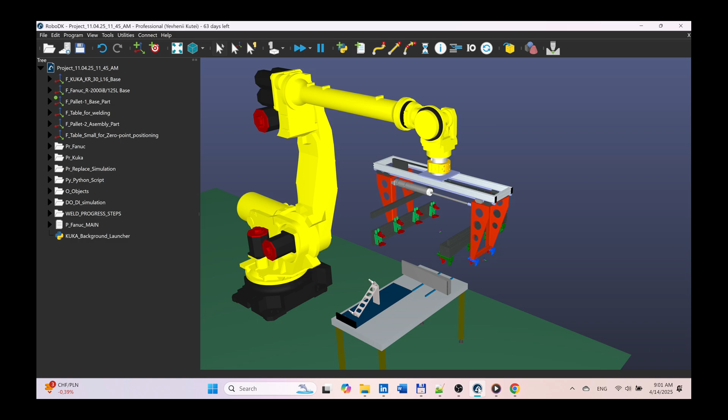This video describes one of the key elements of the published project, the gripper, designed to work with a FANUC robot. The gripper performs gripping, positioning, fixing, and transferring of the product components.

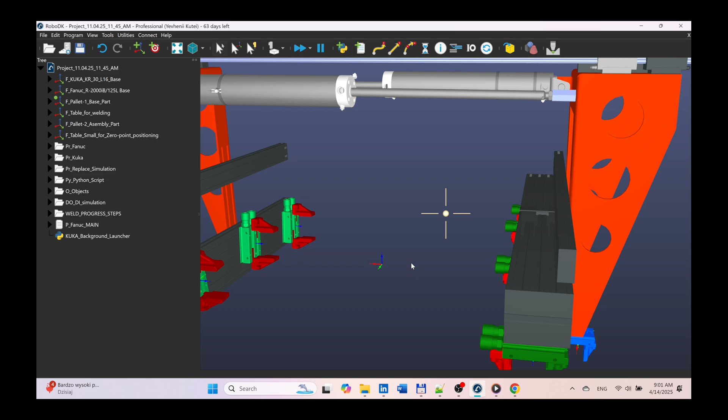Due to the absence of suitable models in the RoboDK library and online, it was decided to design a custom gripper. Its construction is adapted to the specific project tasks, taking into account the need for high positioning accuracy when handling the base part of the product, its gripping and precise placement, as well as the stiffness ribs.

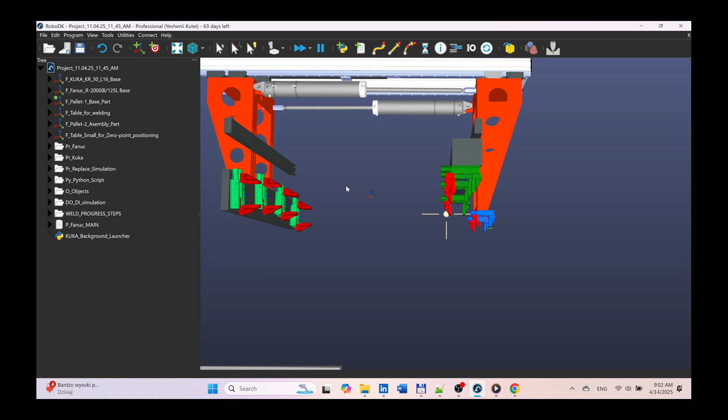On the GrabCAD platform, 2 gripper models were selected as a base, one for editorial adaptation into the main gripping mechanism, the other for adaptation into additional fixing mechanisms. I worked with STL models in FreeCAD and Fusion 360, performing component arrangement and basic preparation, and in RoboDK for final assembly and mechanism creation.

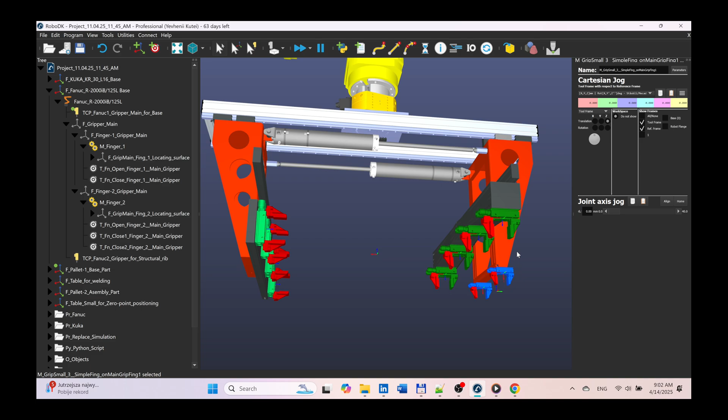The assembled gripper system consists of: 1. A main 2-finger gripper with linear opposing movement. 2. 10 auxiliary fixators mounted on the fingers of the main gripper, implemented in 2 configurations. 2 synchronized fingers with linear opposing motion: 3-component single-axis mechanism. 1 movable finger: 2-component single-axis mechanism. All components were integrated directly in the RoboDK environment.

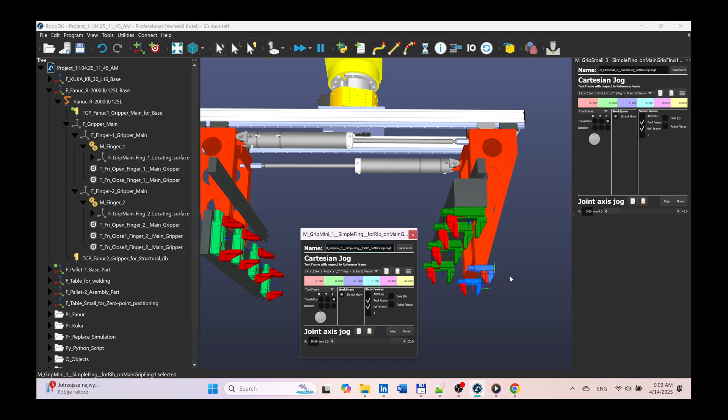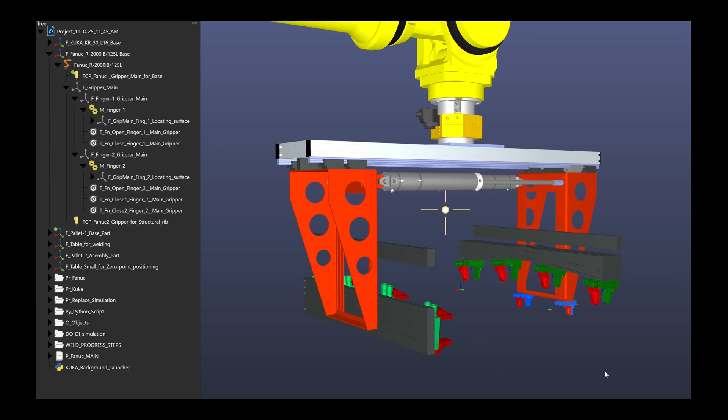The implemented gripper design allows gripping components of different types and sizes, independently controlling each mechanism, applying a step-by-step gripping approach, compromise solution for the main gripper. During implementation, it was revealed that in RoboDK, creating a 3-component single-axis mechanism with linear synchronized opposing motion of active fingers does not support assigning a separate reference frame for each of them.

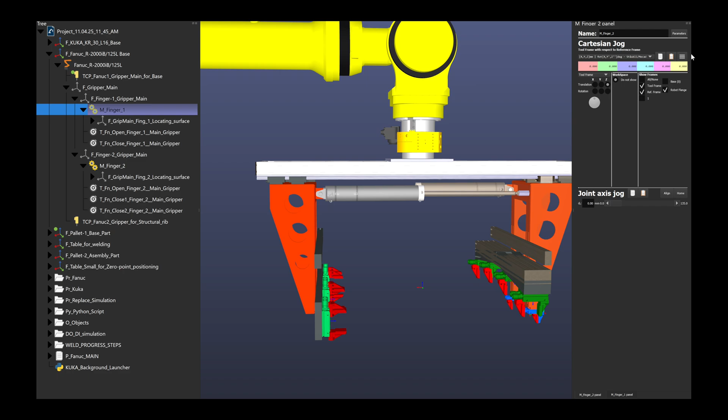Since my goal was to build a 2-finger mechanism with the possibility of placing additional gripping modules on each finger, the decision was made: based on 3 elements, 2 2-component single-axis mechanisms were created with opposite attachment of fingers to the base of the gripper. This approach allowed assigning a dedicated reference frame to each finger. Each mechanism controls a single finger, and both are installed on a shared reference frame in opposing directions.

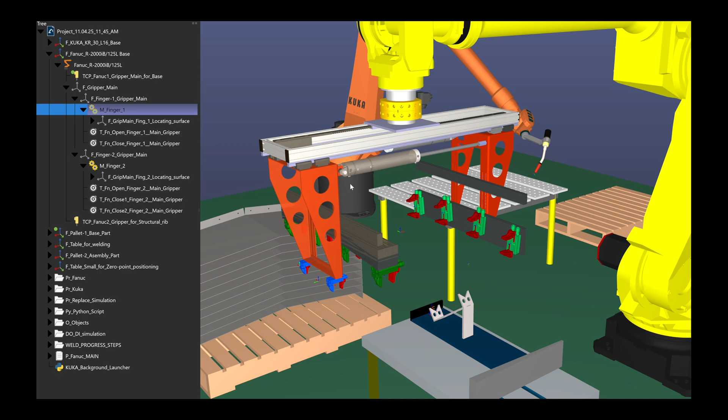Advantages of this solution: independent control of each finger, ability to attach separate groups of fixators on each finger, full integration into the RoboDK structure without functional limitations. Although a compromise, the solution is fully functional within the capabilities of the simulator and the project requirements.

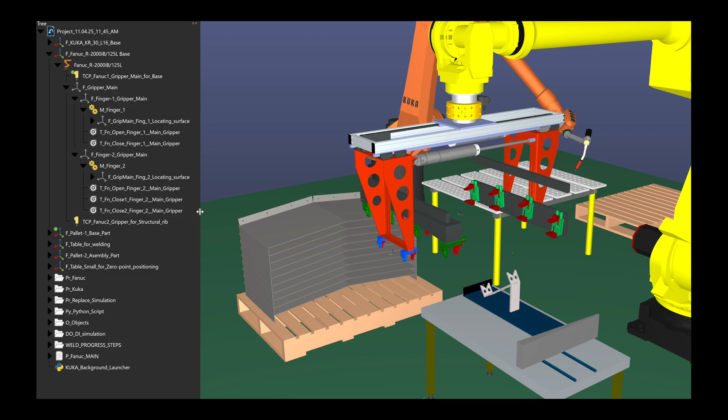The gripper design includes 8 internal fixators for securing the base product component, 2 side grippers for handling the stiffening ribs. For operation with the FANUC robot, 2 TCPs were assigned: TCP-1 central module, TCP-2 side grippers.

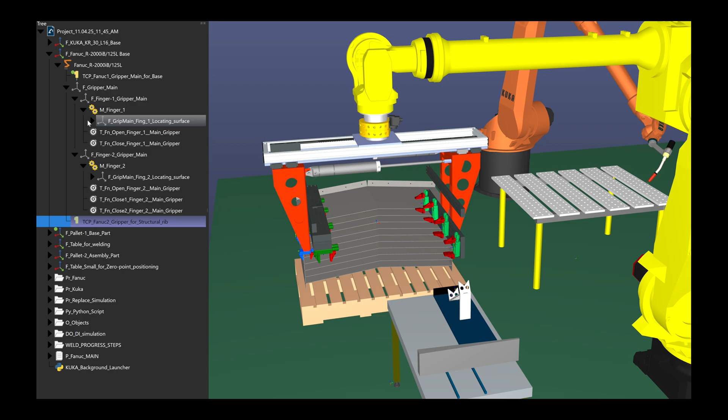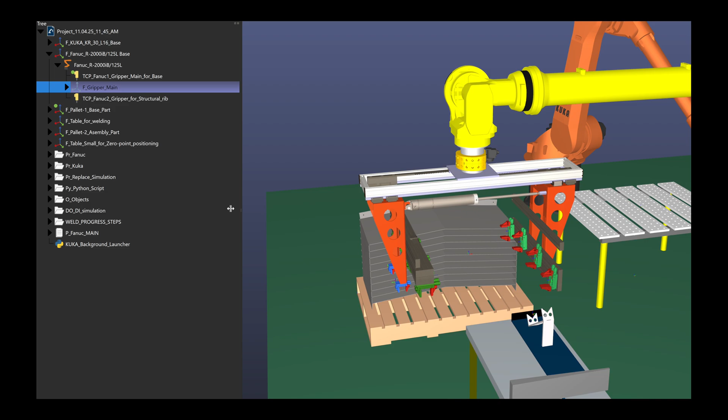After completing the 3D modeling stage, the gripper was fully structured in RoboDK: 15 reference frames, 12 mechanisms, 28 elements in total, 27 targets for motion programming, and 3 additional 3D objects added at the final stage. Program structure for gripper use: 30 offline programs for TCP-1 and 9 offline programs for TCP-2.

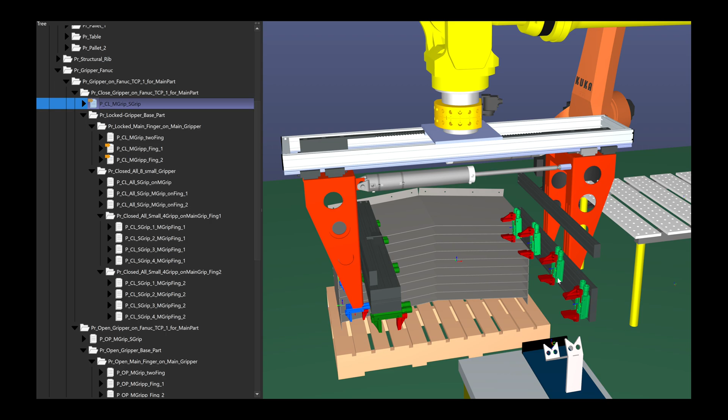Additional technical features: asynchronous movement of the main gripper fingers. First finger, with 4 vertical single-finger fixators, performs linear motion of 39 millimeters. Second finger, with 4 horizontal 2-finger fixators, moves in 2 stages. First stage, a 39 millimeter stroke synchronized with the first finger. Second stage, an additional 10 millimeter stroke in the direction of TCP. This enables precise positioning of the object for double-sided gripping.

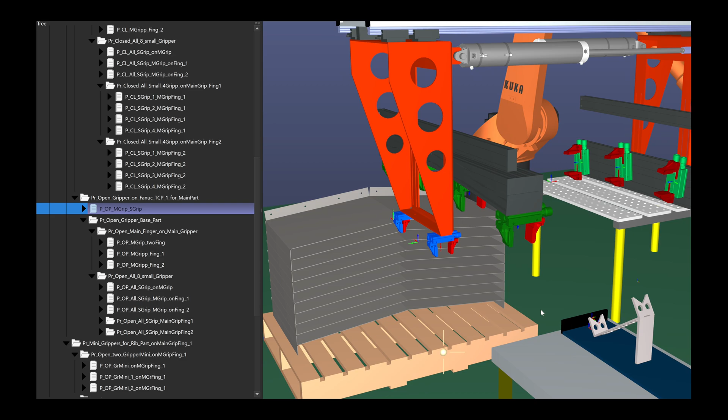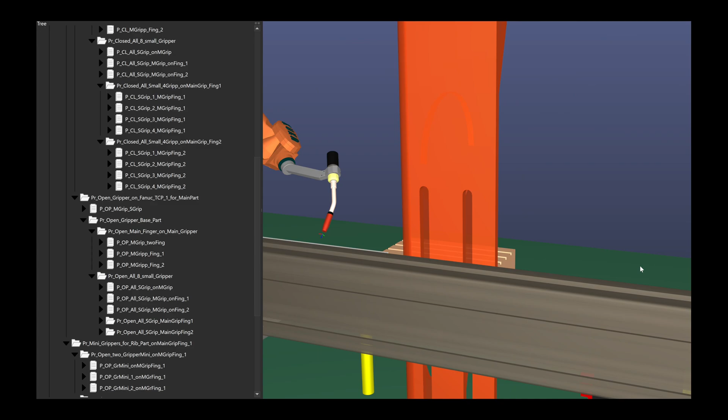This solution is not optimal in terms of positioning accuracy and does not fully correspond to the type graphically represented by the gripper design. In real equipment, grippers of this type operate exclusively based on synchronized finger movement. In RoboDK, it is not possible to reliably implement a complex synchronized approach in which the fingers of the main gripper close simultaneously at 44 millimeters, while the robot TCP1 is shifted by 5 millimeters in parallel. The issue arises due to simulation instability at different speed modes.

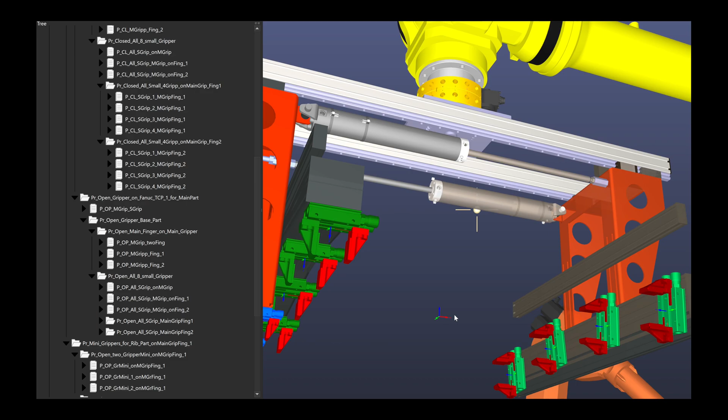For this reason, a simplified solution was chosen. Although the original gripper design plan involved implementing a complex synchronization of finger and robot movements, the compromise approach proved more stable within the simulator environment.

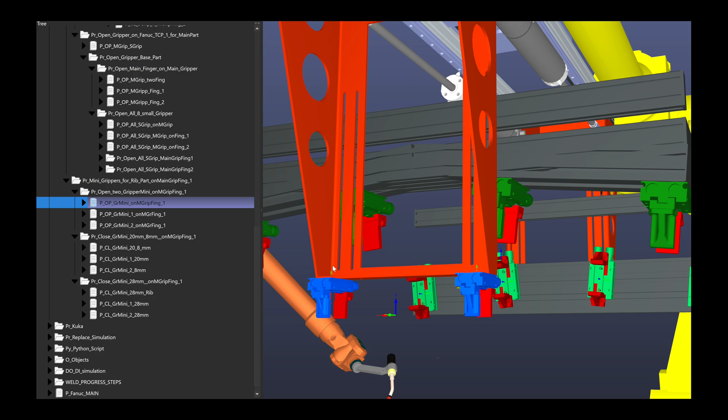Side grippers, 3 positions: 1, closed, gap of 28 millimeters; 2, fully open; 3, intermediate locking, first gripper, 20 millimeters, and second gripper, 8 millimeters. The intermediate locking positions are used for gripping the ribs from a horizontal position, followed by transfer to the gravitational calibrator.

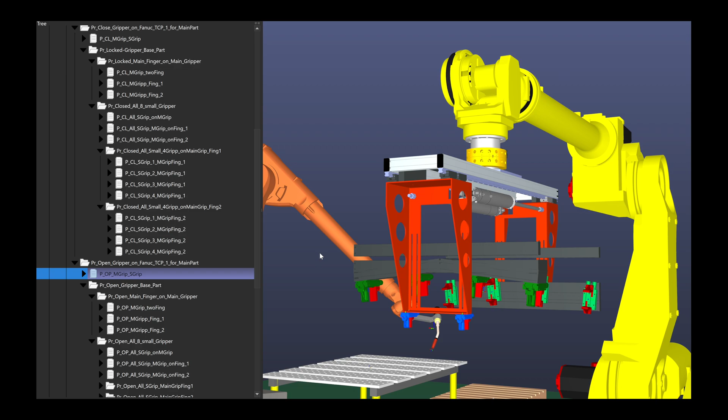Conclusion: the gripper design is fully implemented in RoboDK, built on reference frames and mechanisms, programmed offline, optimized for simulating complex multi-level interactions.